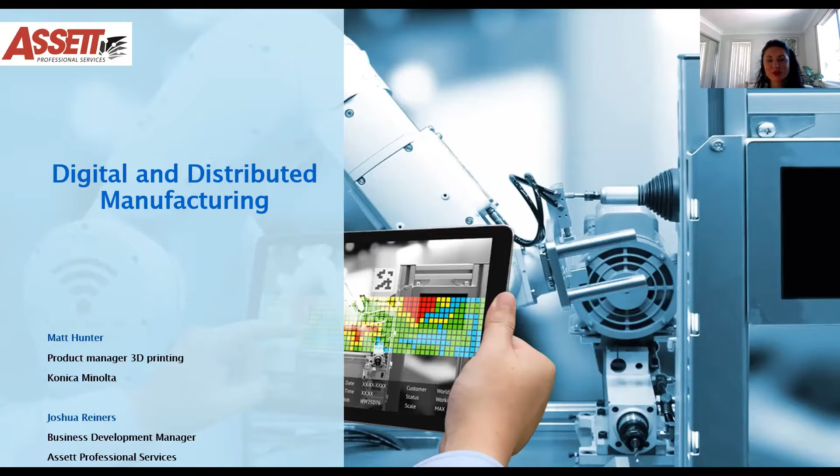This presentation is talking about how and why the things that we're making are changing and can change through 3D printing. And this exciting technology is happening right across Australia. We've got some really exciting innovations coming to the Illawarra as well. So what I'll do is hand over to Josh from Assett Professional Services. Josh and Assett are part of i3Net, wonderful active members of the network. So Josh, I'll hand over to you if you'd like to introduce yourself and kick things off.

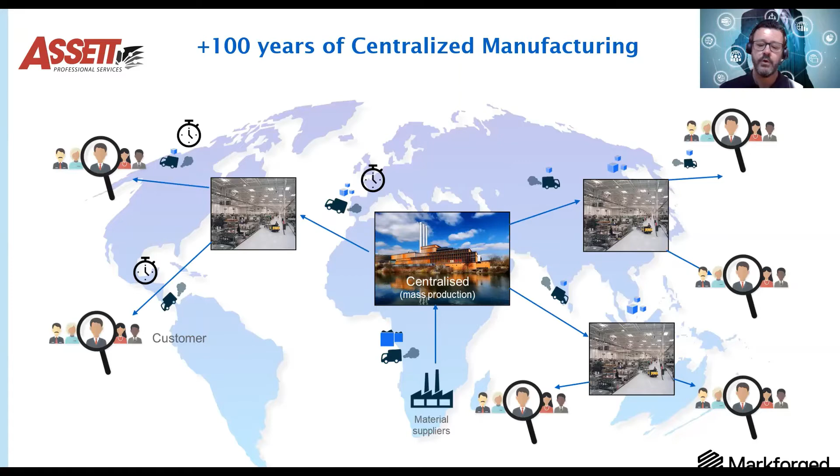The way we have traditionally manufactured, combined with the current global conditions, is kind of working against us. So where does this lead us? The way things are made is changing.

We're moving from a more traditional analog way of manufacturing to a digital way of manufacturing, where we can truly manufacture on demand, anywhere, anytime, in any shape. So imagine taking your design and optimizing it for 3D printing, having your prototype, your product or your tool available to you in a very short amount of time — leading to better control, reducing your lead times, reducing your downtime, reducing cost, and making you more productive.

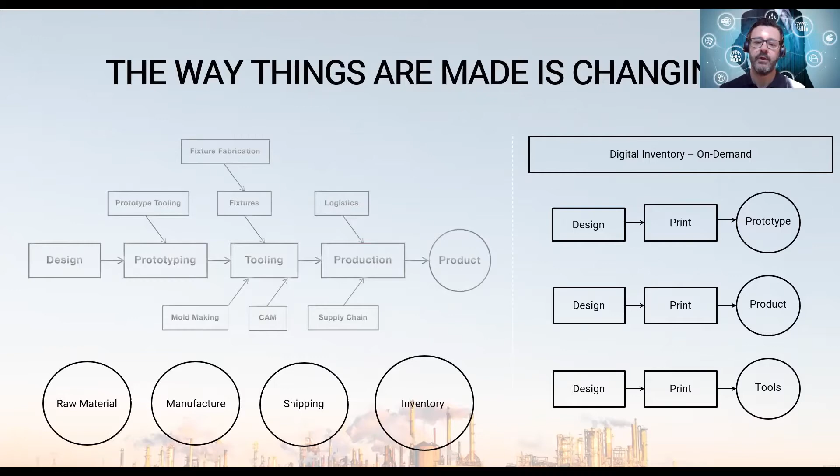Imagine not being a slave to minimum order quantities — you just print what you need. 3D printing is helping companies realize this outcome here in Australia now and in your region.

So what is this concept of digital distributed manufacturing? Well, it's an approach where over time you convert parts into a digital file that can then be reproduced on demand. So digital inventory can be created in a number of ways.

It might happen naturally over a period of time using processes like 3D scanning or reverse engineering based on original 2D part drawings. You might have the CAD file, or you might take open source files that have already been developed and edit them to suit your application.

These part files then exist as ready to print parts located in an organisational cloud infrastructure that can be downloaded and manufactured in the location required. The diagram I've created is a setup actually being utilised as proof of concept by the red meat processing industry here in Australia, where they are putting smaller end-use printers in each location, backed up by a centralised metal printing facility here in Australia to keep their plants operational.

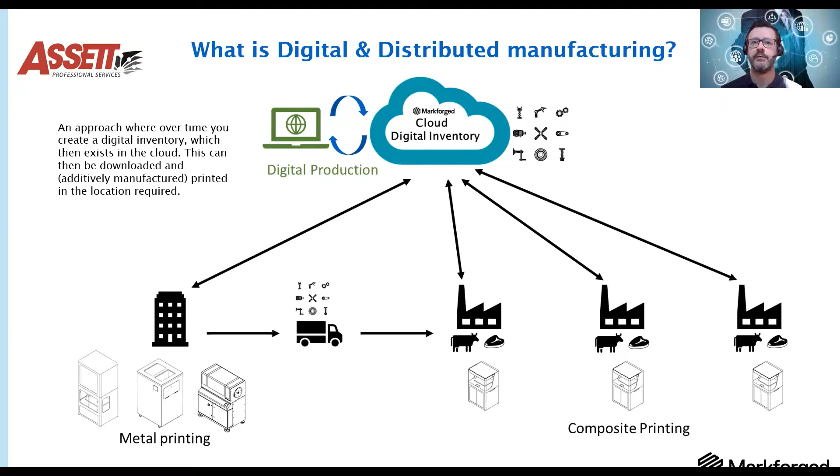So it's a constantly evolving ecosystem, and investing in digital inventory isn't just purely about replacing a physical part. Many of your organisations have got smart people on the ground with ideas on how to improve your processes or parts to overcome problems on site, which can improve parts.

We use what we loosely call design thinking principles - just because a part is made traditionally a certain way doesn't mean it's the perfect part. It's probably designed like that purely because of a limitation around how you actually manufacture it. A lot of times you could lightweight it, add additional materials to strengthen it, or combine multiple parts into one, meaning less failure points and less inventory.

So digital inventory isn't just purely about replacing like for like, although it can be that. Digital inventory is a constantly evolving ecosystem that gets better over time, so it not only overcomes a supply chain issue and keeps you productive, but also gives you a better part, which improves uptime. This is important in particular in the food and beverage manufacturing industry, but also a lot of other industries producing products with a really short shelf life.

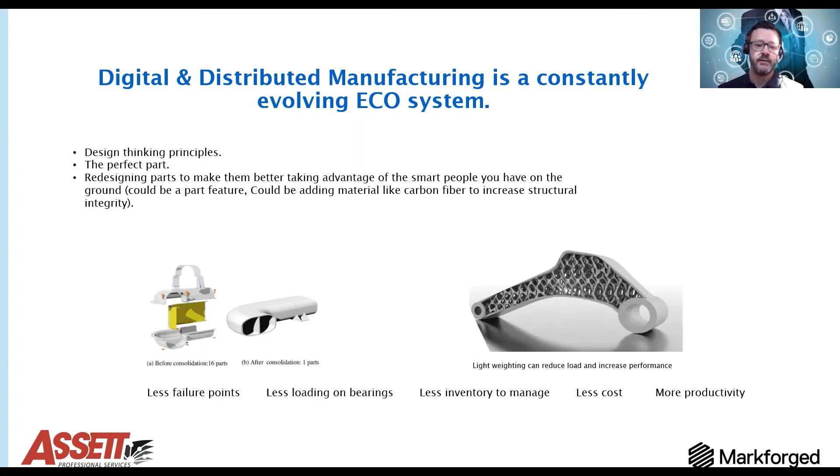Your teams on the ground will have ideas on how to add features and customise parts to get better results. We know that once organisations adopt this equipment, there's an added benefit realised as your teams gain experience with it. Konica Minolta and Assett are here to help you fast track that with the right consultancy, equipment and training.

So how does digital manufacturing add value? Purely it can be, as I discussed earlier, the cost of a part or the performance of a part - making a part perform better, reducing downtime, overcoming obsolescence.

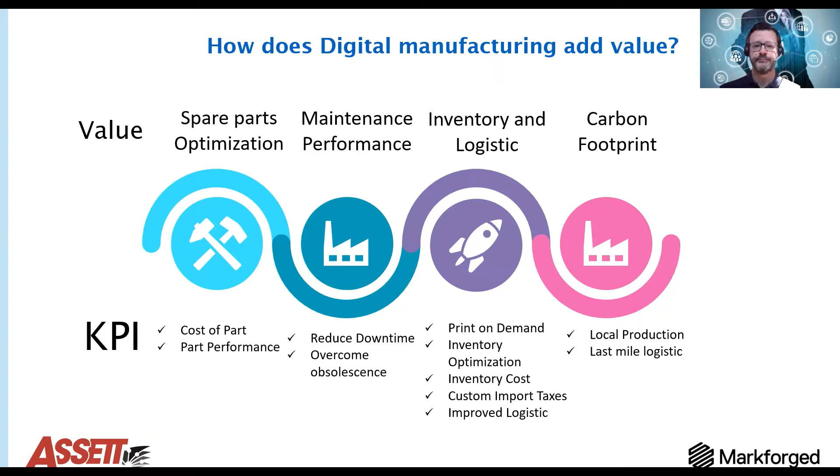It can be printing things on demand, optimising your inventory, reducing cost and last mile logistics - improving your logistics, which all has an impact on productivity.

A wide range of proprietary materials - one of the things helping 3D printing be adopted is the growth in materials. It's no longer purely about prototyping and testing parts before going to a traditional manufacturing process. It's a legitimate manufacturing process in its own right, and the growth of materials has really driven adoption into organisations, becoming a real tool on the workshop floor alongside a lathe, a welder or a CNC mill.

And that's, as I mentioned, the growth in materials. You can see just a small snapshot of some of the materials you can manufacture using 3D printing or additive manufacturing. We'll probably cover a bit more on those in the question and answer component at the end.

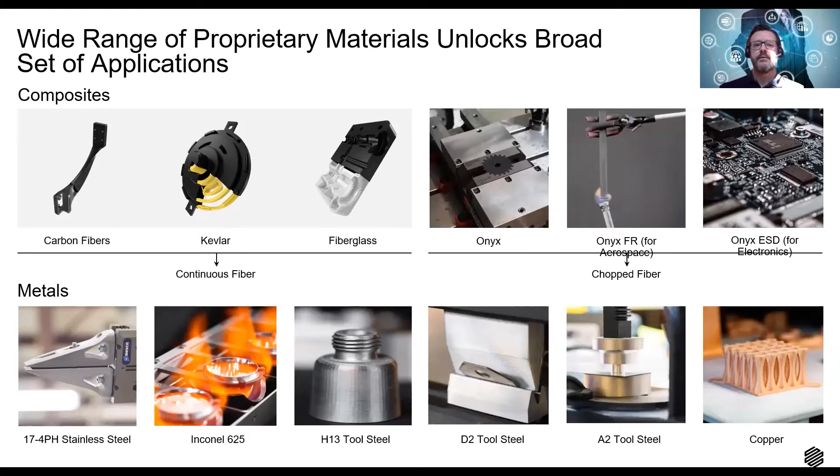I thought I'd cover some of the verticals really adopting the technology, and a couple stick out for me in your region. Aerospace, for instance - a company called Air Affairs is certainly headed down the path of 3D printing. They have a large traditional manufacturing facility with a lot of CNC milling, but more recently they've adopted 3D printing technology for printing carbon fibers, looking at replacing traditionally manufactured aluminium parts with carbon fiber, lightweighting parts, and printing parts that couldn't be traditionally manufactured - that's the strength of using something like 3D printing.

Obviously the military too - you see the US Army and Navy, and in particular the Australian Navy and Air Force have now gone down this path. There's actually a 3D metal printer on one of the bases down in your region that was purchased just recently, along with some carbon fiber printing, which they're using in some aerospace applications. Automotive is a really interesting one as well - we've got a number of aftermarket automotive manufacturers using 3D printing for a number of different reasons.

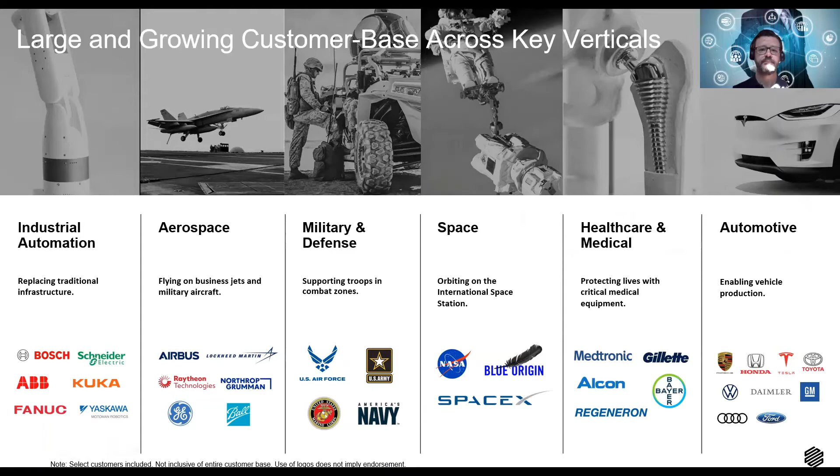So how do we partner with you? Well, Markforged are one of our suppliers, and we can talk about that a little bit more. But also, when I say how do we partner with you, I include Assett in that - they're our partner in your region.

How that typically would work is it comes out of consultancy. It's great to have the technology, but you need the support of an organisation to assist in a couple of different ways. One is to discover and uncover opportunities to use the technology, and the other is the support that you wrap around it. It's great to have a piece of infrastructure like this, but once it becomes a critical piece of your infrastructure, if you don't have somebody in your region that's going to support it, service it, come out on site if it's down for any reason, supply consumables and support around it in a timely manner, then you can't really use it as a critical piece of infrastructure.

And that's where Konica Minolta and Assett fit in with you to help you adopt this type of technology. We'll talk a little bit more in the question and answer section about how you identify whether or not 3D printing could be right for your organisation.